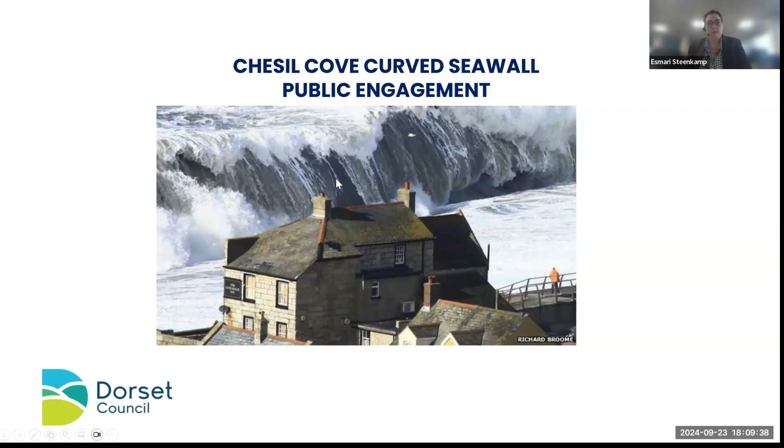Good evening. I'm the Coastal Risk Manager for Dorset Council. So as such, I head up the team of engineers who are responsible for the coastal defence and harbours infrastructure of the council. I just wanted to introduce you a little bit to the team and give some background for the project. So I'm the manager of the coastal risk team. Ian Fitz, who is a project engineer in my team, has been tasked with this project. Now I give him support and steer on this project.

Then we have Jacobs, who is our consultant on the project, and they bring their specialist knowledge to it. And Ross Fitzgerald is here tonight with us to discuss more of the technical detail. So there are members of the core project team here tonight, but I just need to note that there are almost a dozen other people that work behind the scenes and are involved in the project, and they are mostly from scientific, environmental, planning and engineering backgrounds, and they all contribute to this project from their perspective, specialist fields and knowledge.

So Ross is going to get into the meat and bones of the project after this, but I just wanted to give some context to everybody here tonight on where this project is and where it is coming from. So, Nikki, if you can just give the next slide, thank you.

In 2011, the Chesil Cove seawall refurbishment study summary report was done. It's a mouthful. It was undertaken to assess the existing condition of the structure and identify possible options for refurbishment. That study and report found that the structure was in an overall good and fair condition, and it had about 15 to 20 years of residual lifetime left. That report, however, did also note that the exposed toe piling at the southern end of the wall is a matter of concern.

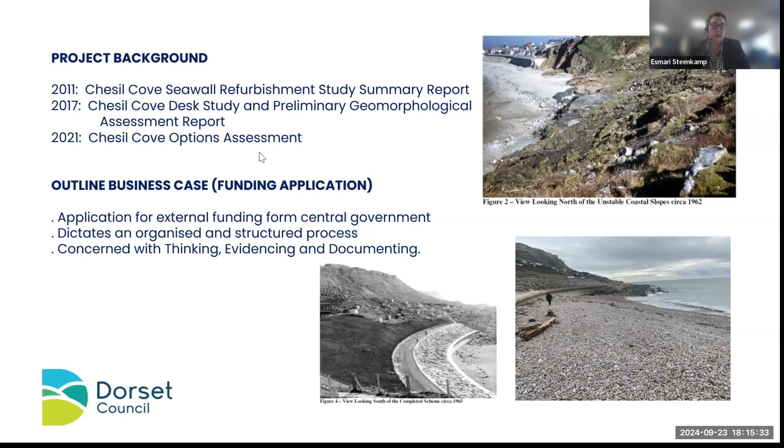Nikki, the next slide, please. So I just wanted to give a bit of a strategic context to the project. There is the National Shoreline Management Plan, and for this section of the coast, it is a hold the line policy. So that enables us to actively intervene when it is necessary. We're also busy with the flood and coastal erosion risk management strategy that covers Portland, Underhill to Wyke Regis, of which this location forms part of the area of that strategy.

And then we've got the West Dorset and Weymouth and Portland local plan of 2015. Now, there is a specific key strategic objective in that plan that I would like to highlight to the audience here. And it reads, protect and enhance the outstanding natural and built environment, including its landscape, biodiversity and geodiversity, and the local distinctiveness of places within the area. This will be the overriding objective in those areas of the plan which are particularly sensitive to change. And this is, in my view, very applicable to this location and this project that we are busy with.

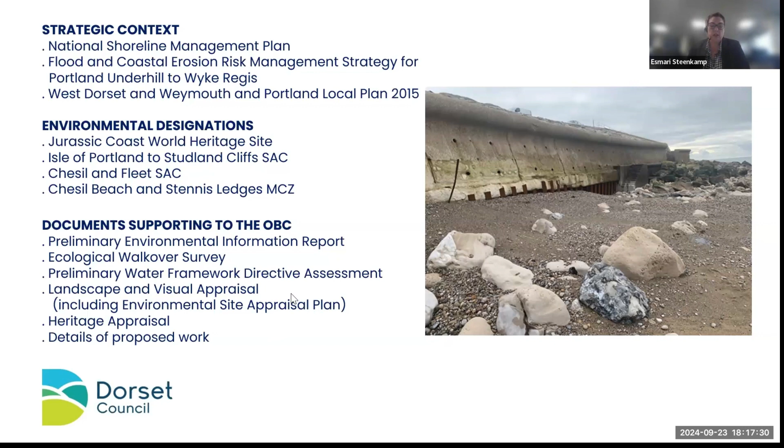There's a number of environmental designations at that location, and that gives rise to key areas of concern that need to be addressed. Therefore, with our business case and our business plan that is submitted, there will also be supporting documentation that will address these key areas for consideration, and those documents are noted there in the presentation. So that's your preliminary environmental information report, ecological walkover survey, preliminary water framework directive assessment, landscape and visual appraisal, including the environmental site appraisal plan, heritage appraisal, and then details of the proposed work. So Nikki, if you can just get me the last slide, please.

So the project going forward, we are hoping to finalize this document by the end of this year, after which it has to be reviewed by the cabinet and approved, because the cabinet has to put forward funds towards the project. After that, we will submit it to the EA for approval, which will then unlock the funding that we wish to unlock for this project. Then planning and detailed design will follow in June 2025, and hopefully construction in the autumn of winter 26-27.

I think it's just important to note at this stage as well that the planning and design stage will come with its own rounds of engagements. There are many licensing and approvals that need to be obtained before we can go do anything. And that includes also a public engagement process under which we will put the designs forward to the public for input. And this project, like any other development in Dorset, will go through the regular planning application process of the council. So that is where we are at the minute. And I will hand over to Ross now to give you the technical information of the project.

Thank you very much, everybody. Thanks, Esmari, and thank you everyone for having me along. And hello, let me just share my screen now. Bear with me one moment. This one here. Let's put that in slideshow. Could somebody give me the thumbs up that you could see a large orange slide? Excellent. Okay, I shall proceed.

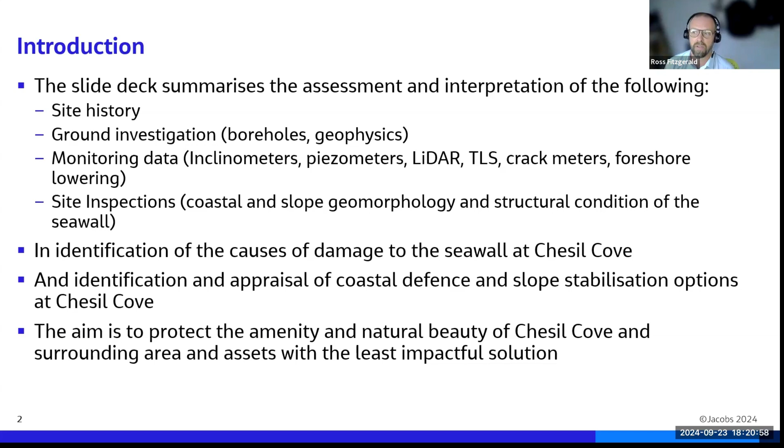We're also going to look at coastal defence and slope stabilisation options at Chesil Cove for the future. And I think, as Esmari said, the aim is to protect the natural beauty and the amenity of the site and impact things as little as possible.

Over the next 100 years, this debris was gradually eroded back to the coastline by about the late 1950s. And at this point, coastal erosion started again of the actual slope itself. And this kick-started a lot of debris slides and mudslides and things. And that's the reason why the seawall was put in the first place.

So the cause of the 1857 slide was loss of toe weight. So as the coast erodes, you lose the force that resists the landslide because the weight at the back of the slope starts winning. So although the seawall isn't designed to stabilize the slope, it's a coastal defense structure. It's vitally important in preventing deep-seated landslides and shallow landslides. So this is a natural and cyclic process that goes on.

Okay, next is just a few of Stuart Morris's photos from around the time of the seawall construction. So thank you to Stuart for providing these. The one at the top and the one at the bottom left show the slope. So here we can see mudslides and compression ridges and tension cracks in the slope before the seawall was put in place, which illustrates the point I was just making.

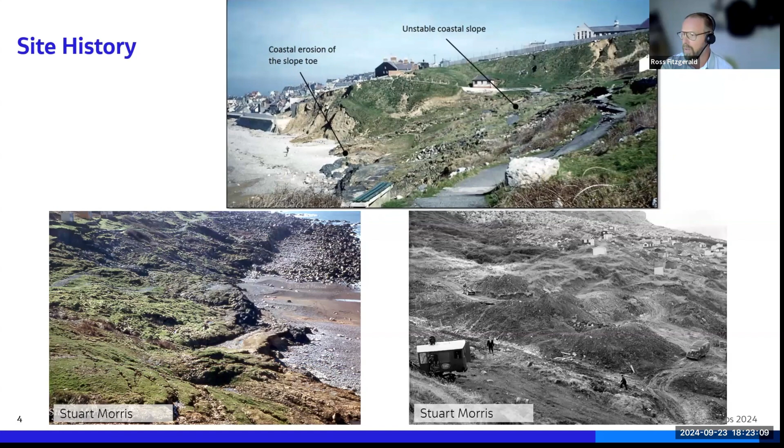And the more of this material that is lost to coastal erosion, the more you destabilize the wider landslide system that goes all the way up to the headscarp, which is the top of those mining dumps, sort of piles of rock. The bottom right image, we can see a haul road and a digger at work when the seawall was being constructed.

But what happens when the beach is offshore? The clay underneath gets worn away. And as the clay gets worn away, the seawall, which wasn't designed to have the clay being worn away, loses support because the seawall's foundations are in this clay.

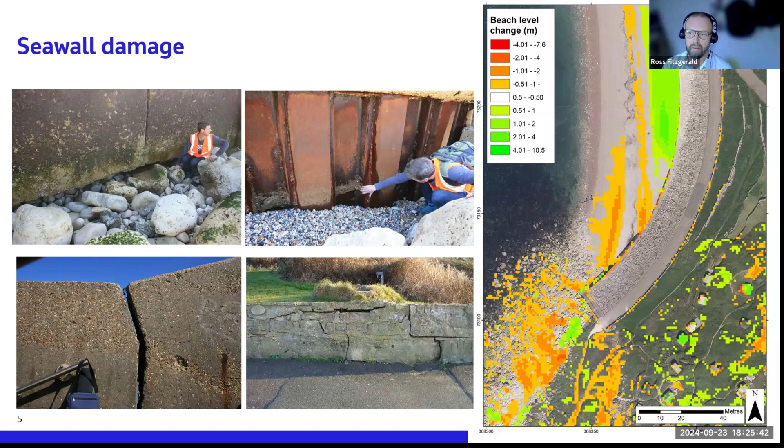So the seawall is still robust, but it just needs a bit of help to see out the next 100 years, and that's a big point. So when we do these sorts of projects, we have to consider the next 100 years. So bear that in mind as we go forwards. This last one here, I'm just going to get the pointer.

Has that worked? No, it hasn't. Laser pointer. Here we go.

So if you follow the rim of the rock apron here, which has been repaired a couple of times, you'll see that the promenade undulates. And the reason that that is settling is because material has been lost from below here, probably out from under the seawall through the piles. And that could be a really big problem because you're kind of being eroded from behind, essentially.

Okay. Next, this is the augmentation works at the southern end of the seawall. There's no foundations, but it was sat on the clay. Basically, this is all completely eroded away now. And I know Ian's been measuring this in recent years. We've actually stopped measuring it because there's nothing to measure anymore. There's no clay left there at all.

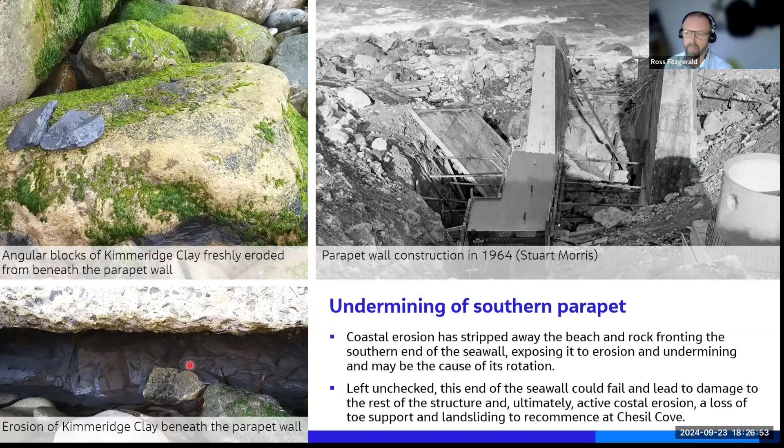Okay, so next, this slide makes the point that although the seawall was excellently designed and built, we weren't able to predict in the 60s that the coast was going to erode and leave the southern end of the seawall proud of the alignment of the beach, so sort of unprotected. So really this is the problem area here, where we're seeing that the structure is slowly rotating forward because of this

loss of support here. It was originally thought, and the reason I was involved, because I deal with landslides a lot, was that there was a landslide behind it that was pushing it over, but this isn't actually the case. Those cracks I showed you on this wing wall, if the earth pressure was coming from upslope, these wouldn't open up, they'd be compressed together. So it's actually the fact that the front of the seawall, the seaward facing bit, is losing support, that it's slowly kind of falling over.

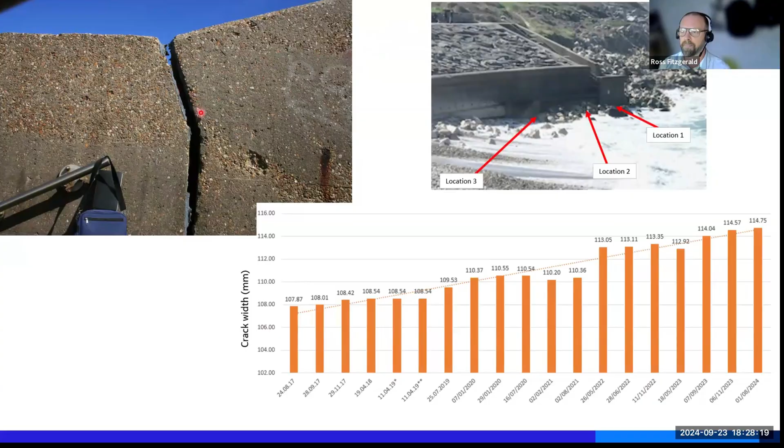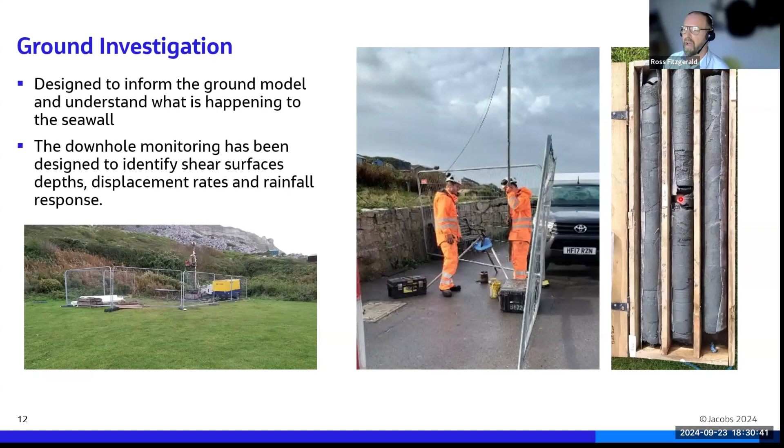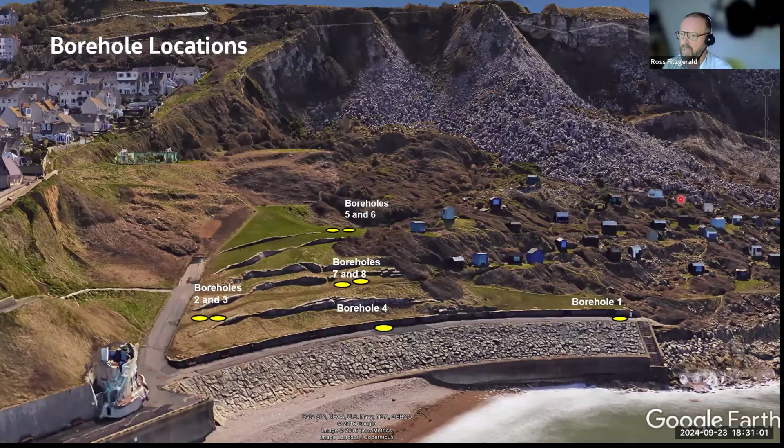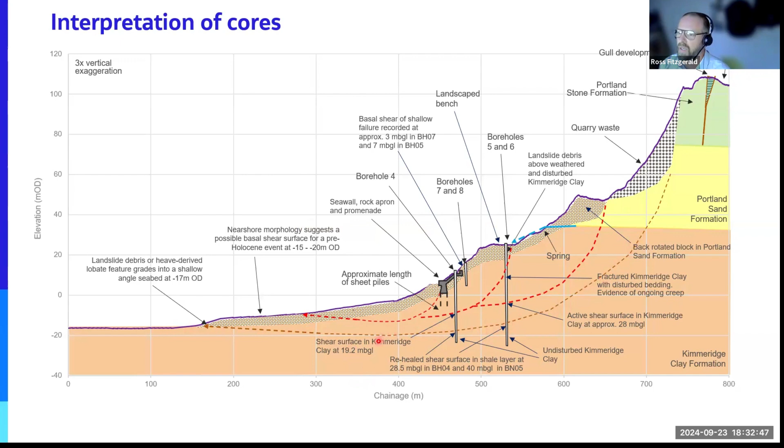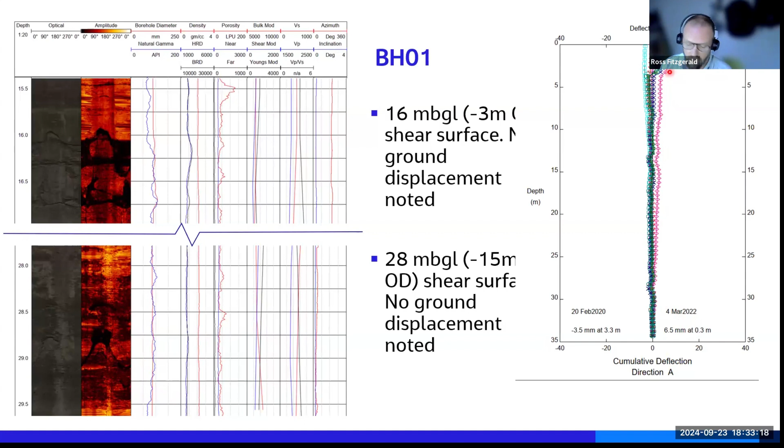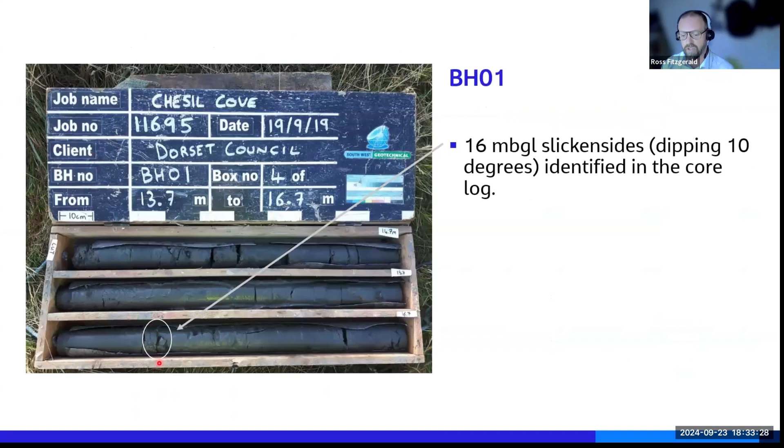So lots of things here, but I've just shown some pictures of some of the geophysics which look down the hole and they find these disturbed areas where the ground is moving. And this is a shallow one in borehole one. So this is in the seawall. This shows that over just over 2 years, the seawall has moved just over a centimetre at the southern end towards the sea, which isn't alarming, but it's obviously not great. And it's at the depth where we're seeing the shear in the ground, and also at the depth we're seeing it in the cores. So these lines of evidence stack up to prove the ground model and what we're seeing.

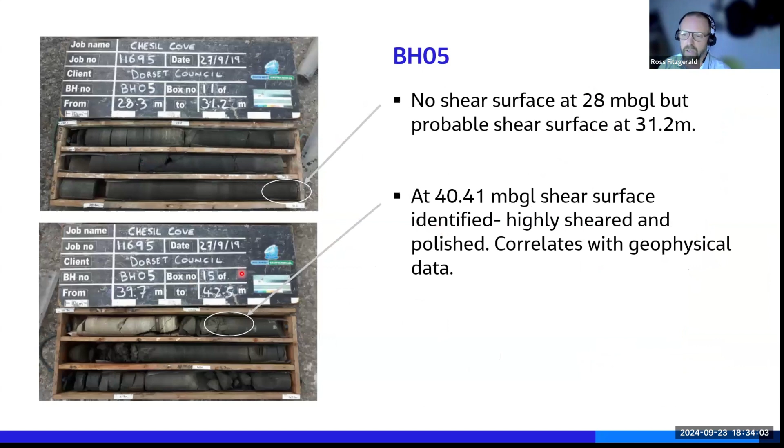Here's borehole 5. So this is further up the slope, and don't worry, I won't go through loads of these. We're also picking up that shallow earth movement, in this case at just over 5 meters, so a bit deeper here. But we're also picking up, below the depth of the foundations of the seawall, this deeper 1857 landslide, which is creeping very slowly, and we really don't want that. We don't want to lose any of the toe to encourage this to happen. And again, it's backed up in the logs and things. I won't labour through all of that.

This is a schematic summary of the direction and rate of movement. And it really backs up the structural report in the fact that there is earth pressure being directed into and behind the seawall. And the seawall itself, the southern half, is moving forwards towards the sea, which we definitely don't want. And this end, although we don't have a borehole in the actual seawall, that doesn't seem to be happening. So there's this kind of twist happening to the seawall. And again, all of the lines of evidence stack up. They all make sense in context with one another.

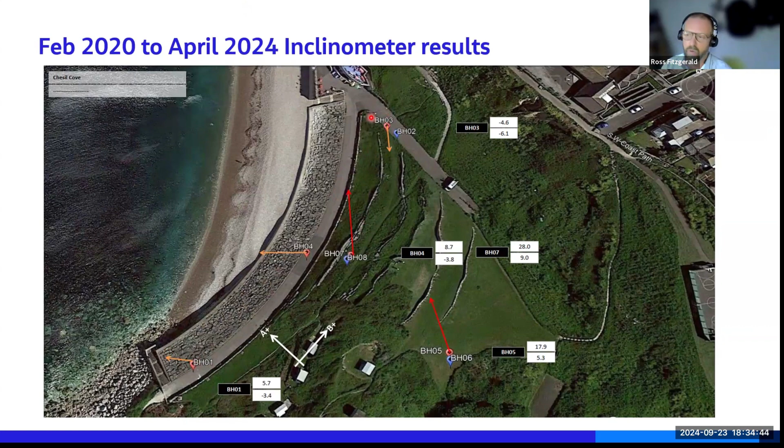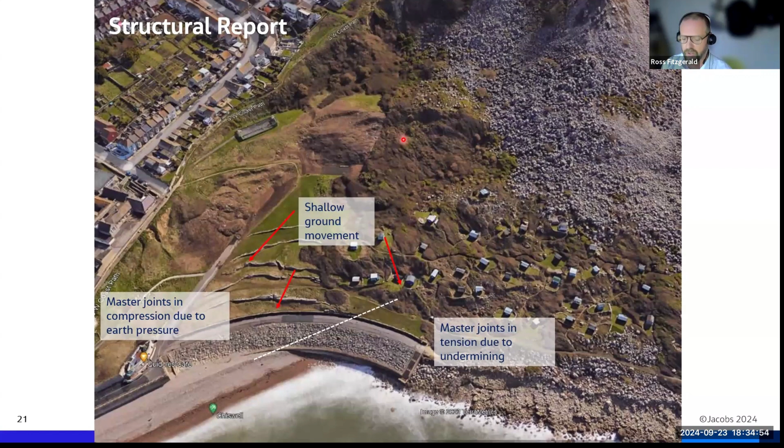I think I've had this one already, haven't I? So this is just explaining the different forces on the seawall at each end. This is the shallow earth pressure. So here you've got 3 to 4 meters of shallow movement, and this is what's causing the damage at the rear of the seawall.

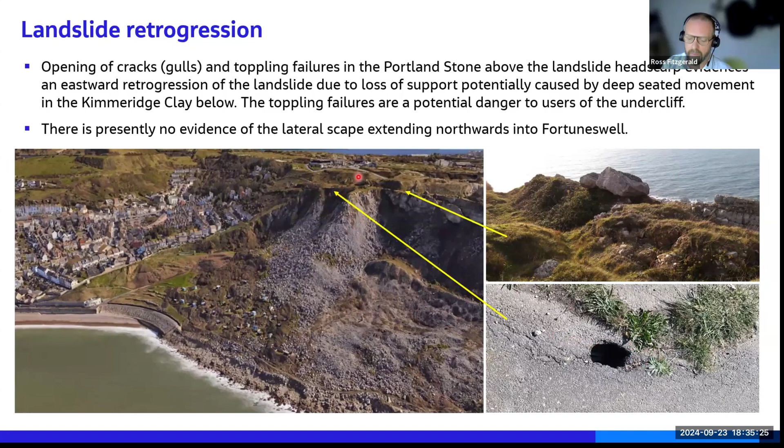Right, the next thing, and again, not being alarmist, but this is potentially what could happen. So what we noticed a few years ago is that you were getting cracks and gulls opening up in between the crest of the slope and the road. That's developed, so there's now quite extensive tension cracking and quite big voids opening up and things.

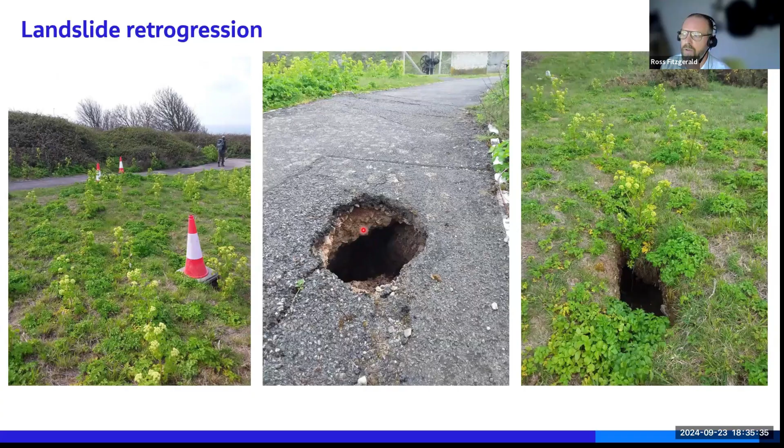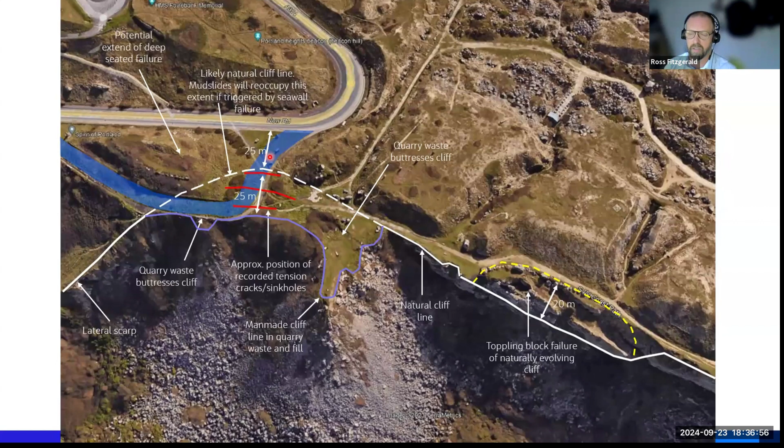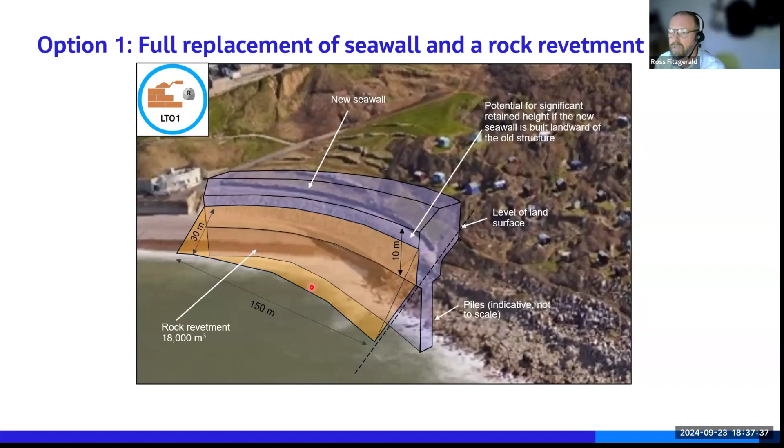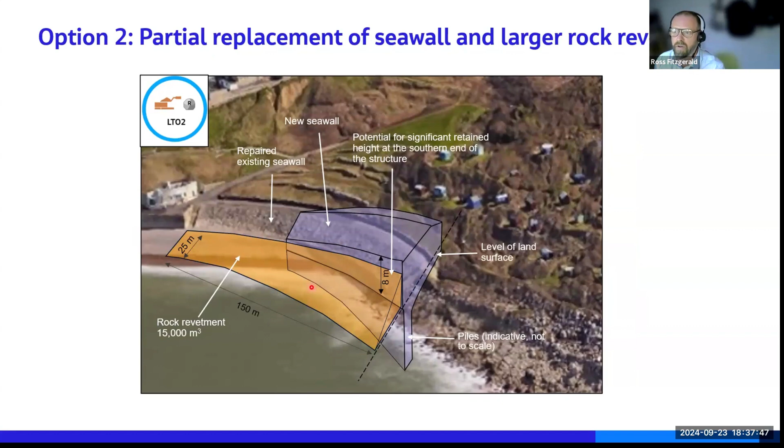It would be an enormous structure. It would have massive implications and disruption. It also triggers all sorts of environmental and heritage problems. So it's really not an avenue we wanted to go down. There's a partial replacement, which essentially has all the same problems. It's really very disruptive. We then have a series of options where we propose to repair the seawall and then protect it with some rock, so we get a long life out of it, far longer than the original design life. So we've got a rock apron option, which kind of blends into the natural rock habitat.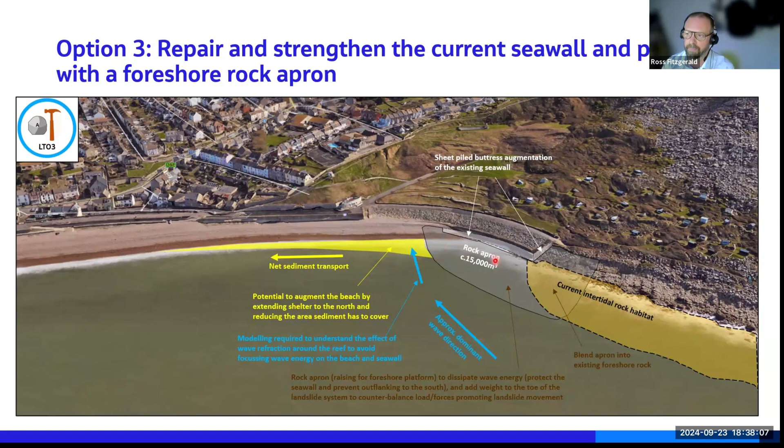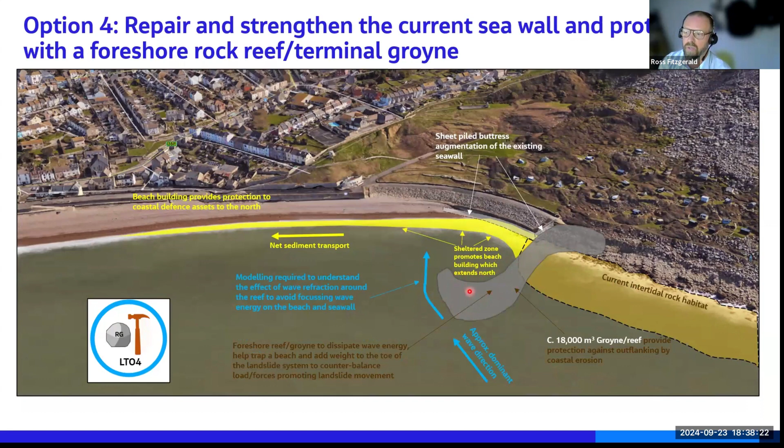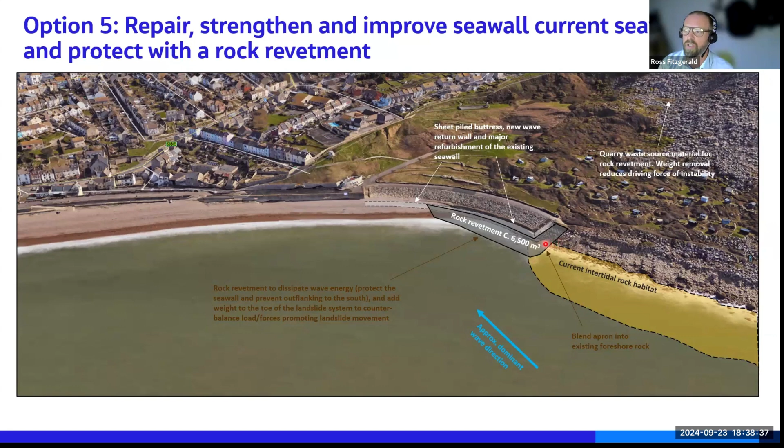We've got a terminal groyne and reef option. The problem with this is that the water's so deep here that you need an enormous amount of rock. So it's very expensive, and it triggers, working in the nearshore here, all sorts of environmental problems. So that wasn't favoured. We've got a rock revetment and a repair. So this is the kind of thing that's on the table. This is where the business case has gone. Something a lot more modest, but well designed to protect the coast.

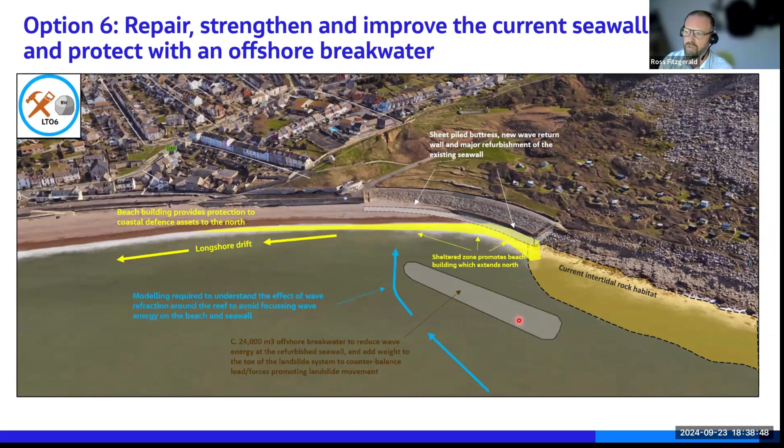You've got an offshore reef option. This is similar to the terminal groyne and reef. It triggers all sorts of problems environmentally and with cost. And we've gone through, as Esme said, a process of assessing the pros and cons of all of these. And here's a list of just some of the things.

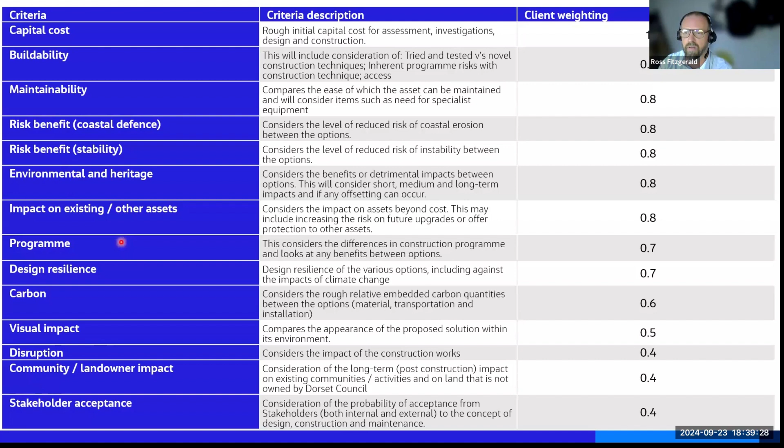So you've got how much does it cost? Can you build it? Can you maintain it? How much does it improve coastal defence? How much does it improve the stability of the whole slope? Because remember, we're trying to preserve the amenity of the whole slope and the assets adjacent. You've got, does it trigger environmental and heritage issues, etc. I won't labour through these because you can see the slides, but there's a long list of things that we have to consider.

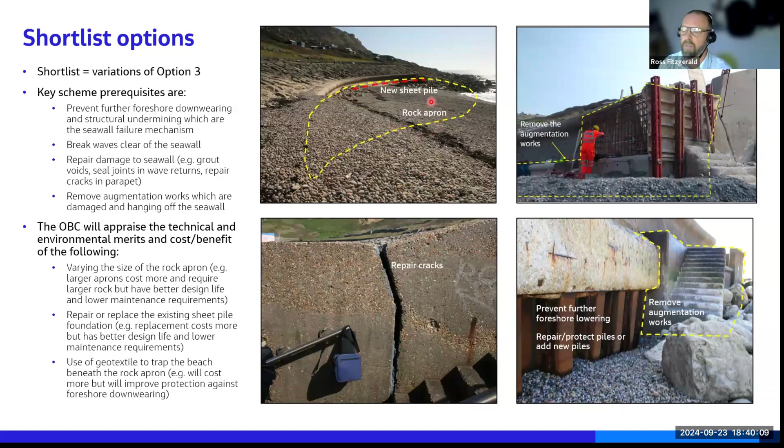So really, we get back to the preferred option. I'm going to start top right. We hope to remove, this is not signed and sealed, the augmentation works to stop them pulling the structure over. We're going to put in a new sheet pile in front of the current one to protect it from coastal erosion, and so that the material under the seawall cannot escape. We're going to repair the cracks. We're going to repair any other concrete bits, and we're going to put a rock apron or revetment, similar, it's just a different name, in front of it.

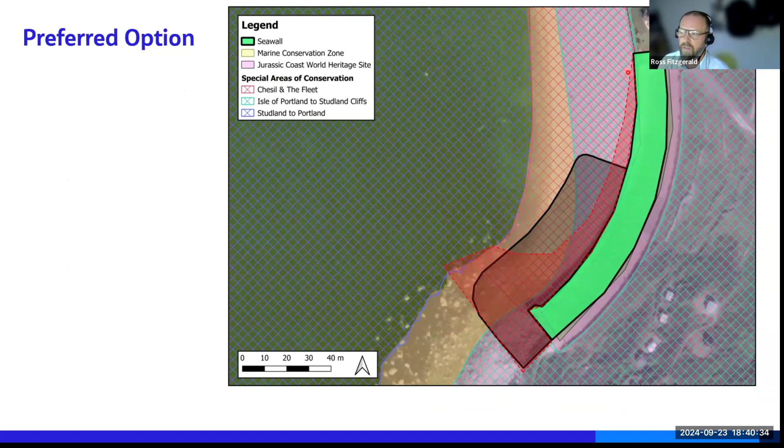And the final thing from me, and I'm sorry I've overrun a little bit, this is approximately the footprint. Again, nothing is signed and sealed, but this is approximately the footprint. By my reckoning, this red polygon I've just added on is the rock that I could see in the photo I'm going to show you next, and I've shown you before. So again, I don't think it's this enormous and sort of scary structure. We really are trying to minimize the scale of this and the impact of it.